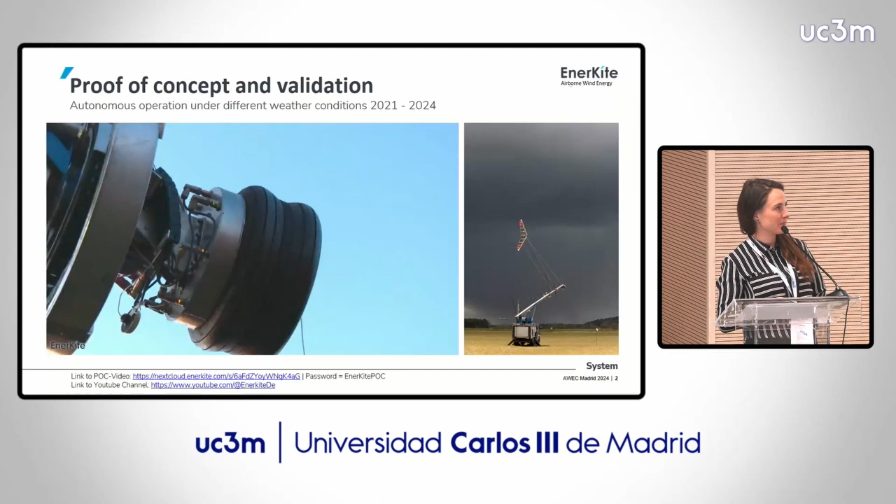Yes, hello. As already said, I am representing Florian. He is our CEO, and I'm presenting for him the Enerwing. That is our wing. I'm, to be honest, not really into the wing topic, so I'm trying my best here. I will start with a short video to show what type of system we have, because not everyone might know us.

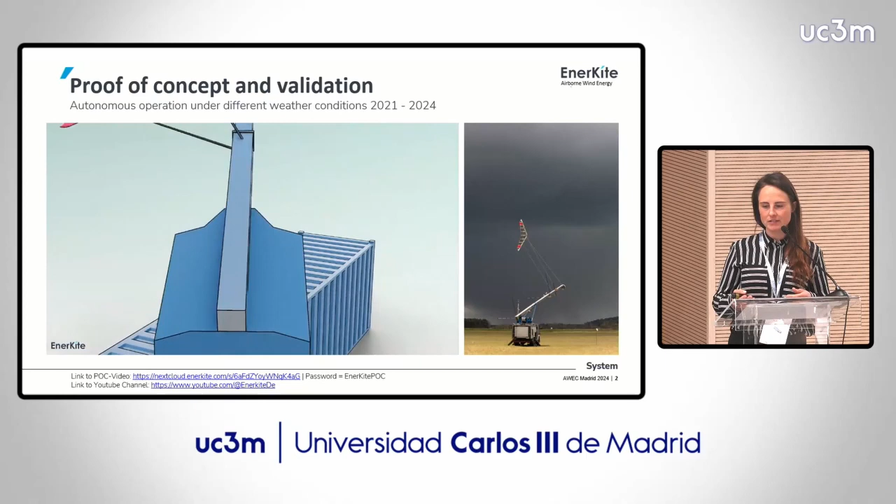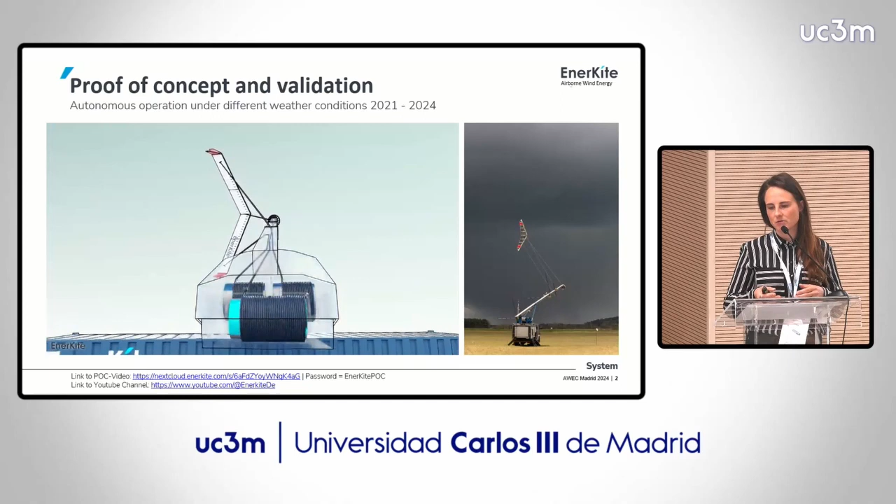Unique for us is the rotational start. As you can see here, we have a fixed kite which is docked at the mast system. The system rotates around the ground station. With that, we can basically get with almost zero wind at the ground into heights where there is always wind. That's kind of unique in the airborne wind scene. Also, the rigid kite is kind of unique. I will tell you more about that later on.

Here you can see the transition into the figure-8 flight. So we are also doing a yo-yo cycle here. What you can see here is our previous kite system. It was only there for testing. It's really cheap and easy to repair, and it was easy for the software to learn with that kite because it has some advantages. With our system, we are able to do the direct retraction because our kite is steerable. When we reach the top of the height, we can steer and then land directly.

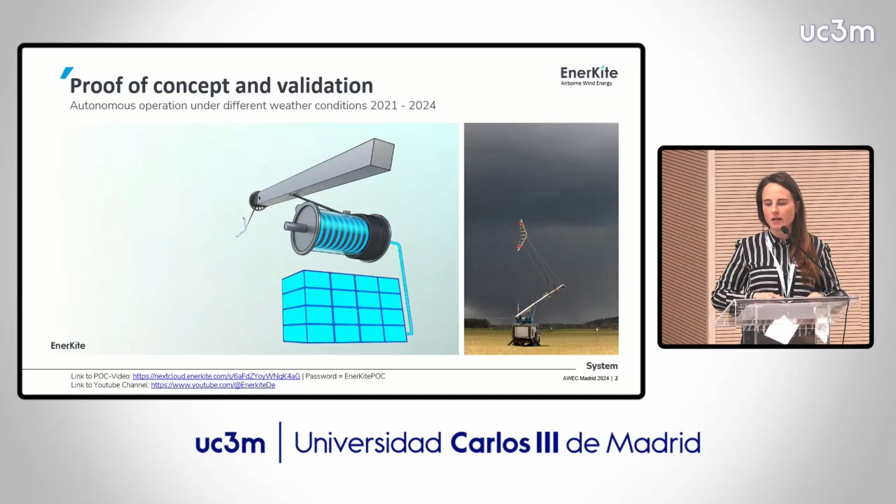Maybe a quick sum up, where are we standing now? So we had the concept proof in 21, meaning we had the full operation from start, operation and landing, fully automated. That we did with the left system here. It's our mobile system. It's a truck, and we have mounted the system on it, so we can test in different situations.

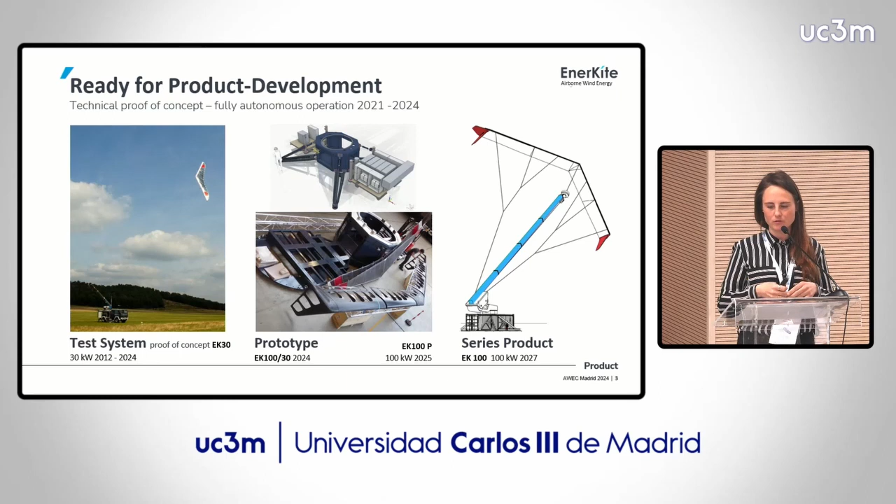We are currently building and mounting the prototype. The prototype is a combination of the top, so the actuators of the old system. The rotating parts will be placed on the new prototype ground station. In theory, the batteries and everything are capable to do 100 kilowatts, but we will start with smaller wings and smaller mast systems, so we are scaling in steps to avoid any difficulties by scaling too fast.

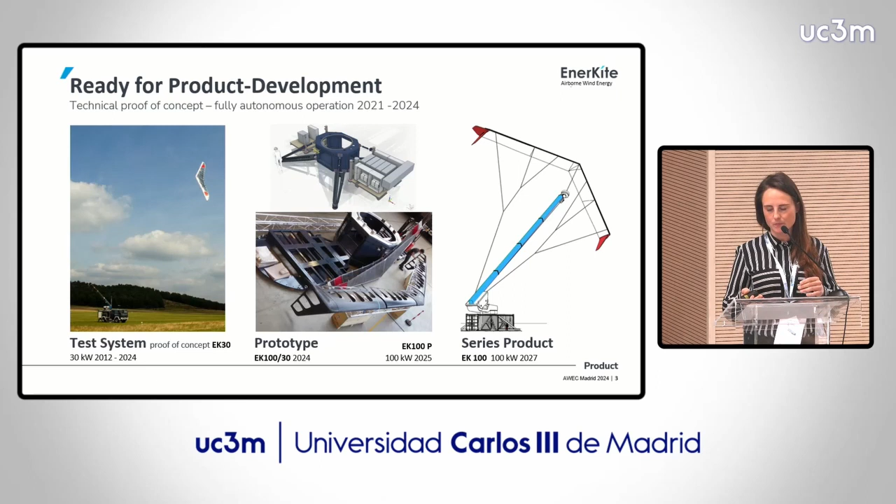Also we have had some difficulties, non-technical, which is why we are a bit behind schedule, but we're still planning to fly with the new system this year. Next year, we will scale up with new kites to 100 kilowatts. The series product, meaning the pre-series systems, will then hopefully be developed until 27.

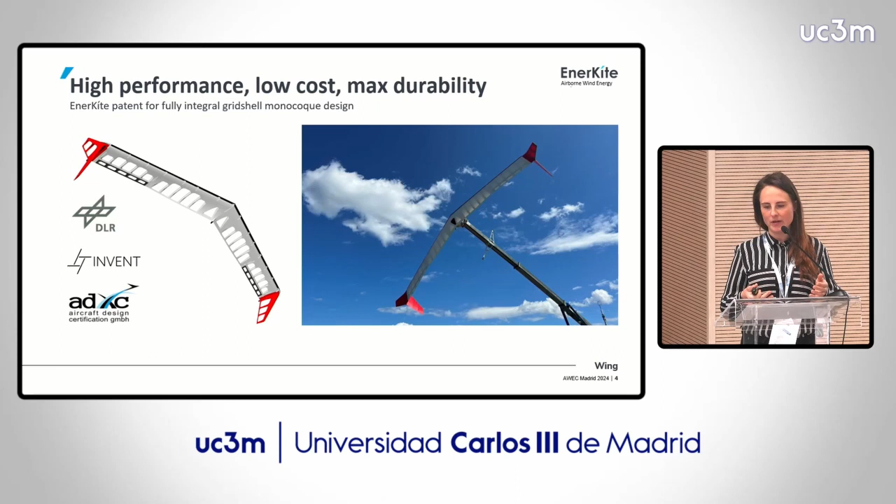Yes, as already said, I'm now here for the wing. The wing is patented. It's a fully integral grid shell monocoque design, meaning as you can see here, we have a full design. Sorry, maybe I will skip that first. Maybe to get a better understanding, we have compared different types of construction.

Now, as I said, patented is the grid shell construction. It only has about 24 parts. They can be mechanically mounted. It's highly durable. It's extremely lightweight. What you can see here in the video is a video of the flight test. Unfortunately, only rotational start and landing. Hopefully next AWEC we will show you the full cycle with this kite as well.

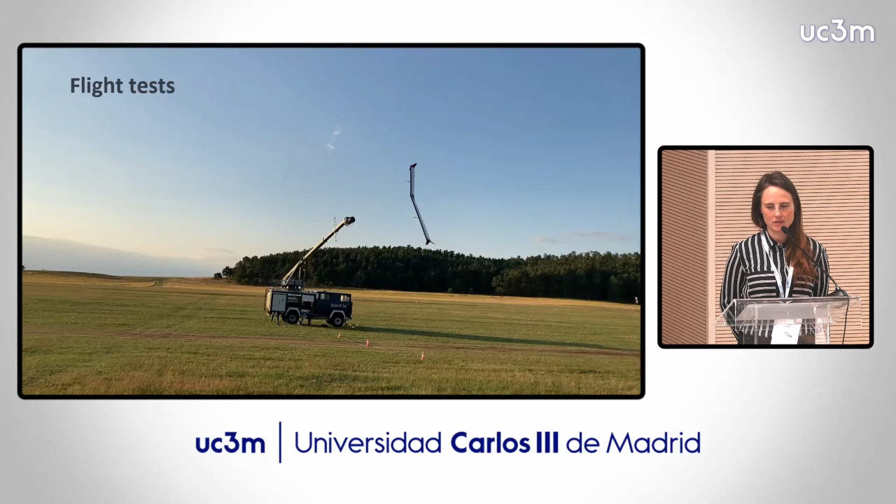What you can see here now is a wing with 6 meters wingspan. It has about 3 square meters. And it's extremely lightweight. So this wing, with everything like covering and electronics, weighs 12 kilograms. In the long term, we are aiming for a weight of 2 kilograms per square meter of only the structure. So there will be some additional weight through the covering or maybe sensors and stuff, but the carbon fiber allows us to be really lightweight.

Basically we can say that we have a system that is really lightweight, durable and robust. It is able to be robust under certain weather conditions, and also robust against birds. Maybe we will see what happens with birds. And so we are really proud to finally present it.

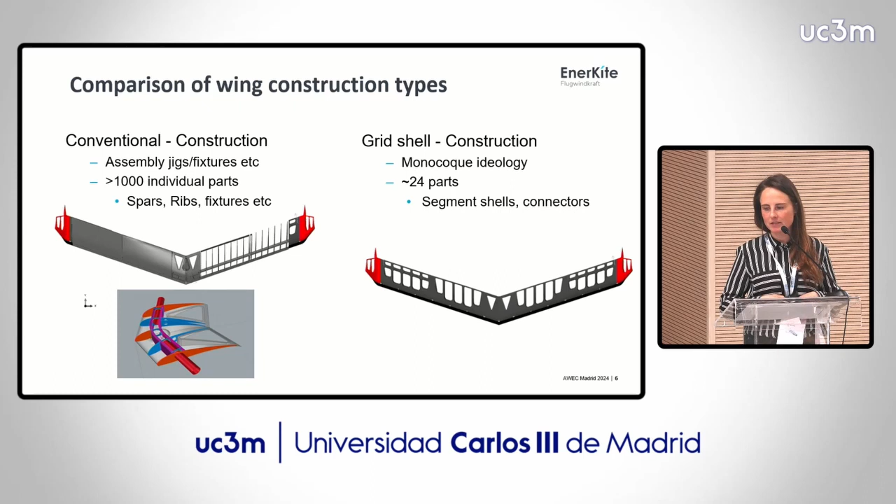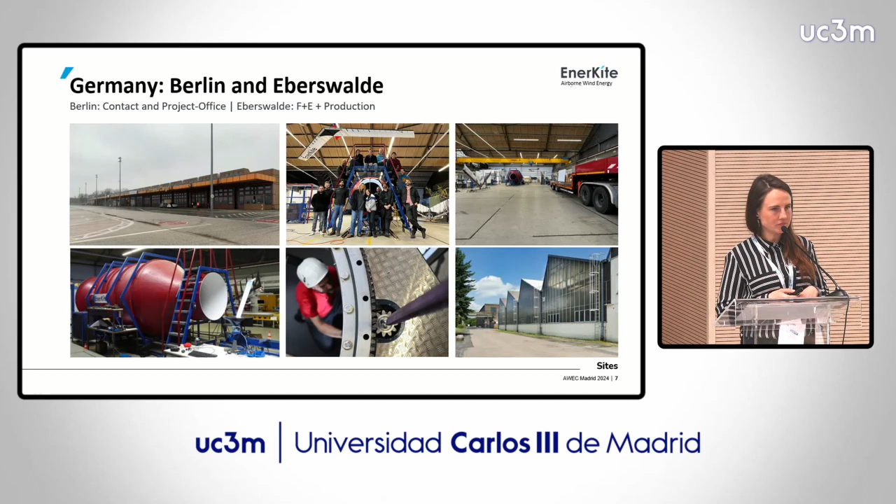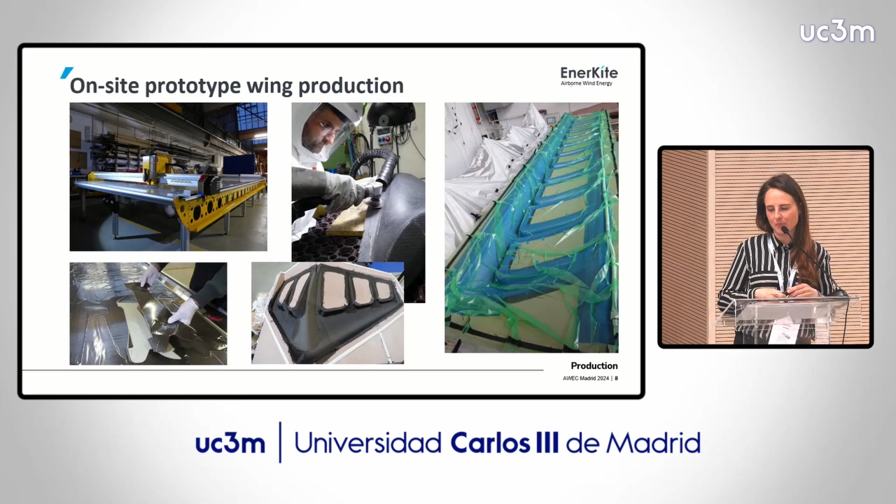So what you can see here is our own CNC cutting machine, where we are cutting the carbon fiber patches, as you can see in the picture below. Currently we are cutting off overlapping CFK parts ourselves, but in the long term it's super easy to do that with robots. Also, due to the low amount of parts, it's super easy to achieve a really easy mounting and production system. What you can see on the right is the implementation of resin on the vacuum.

Maybe also the last slide here, the perspective, where we want to get. So in general, for the whole system, we say we are comparable to land machines. They have a similar or even greater amount of parts. We have done research on how long and how much is needed to produce such systems, and we say that we can really compare to that.

And what is really nice, for the series production we now have some really big partners, and mainly for the wing we are really happy to have Airbus on our side, who is doing the series production. In a first evaluation, they assumed that we can have 120,000 operational hours with one kite. Of course, we have the ability to replace parts that are under more environmental stress. But that would mean we have a durability of 10 to 15 years with one system, and afterwards we have to replace it.

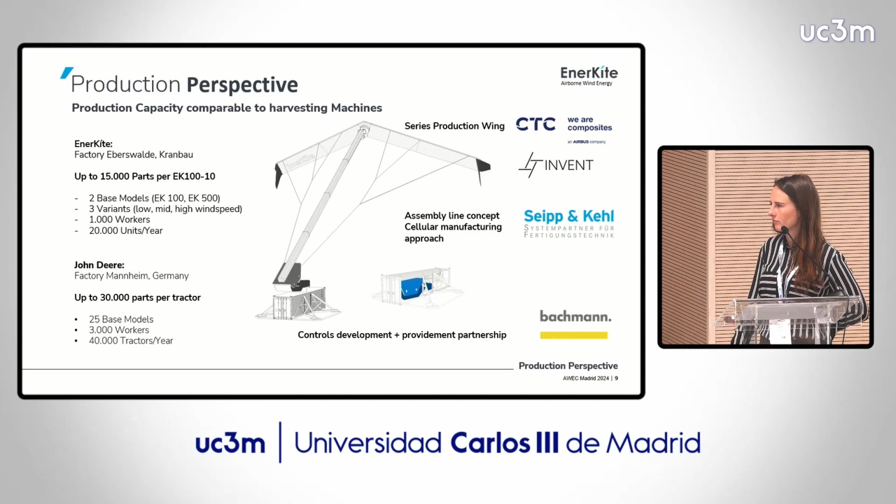But in general, we are aiming for a 30 feet container, so also mountable on a truck and easily installed. Thanks. Any other question? Yes, here, Rod. Wait a second.

Wow, well done. That's incredible. That slide there mentions a low, a mid, and a high wind speed. Is that the wing? Yeah, that is done by the wing. What you saw and what we are aiming for first is a 10 meters per second design wind speed, which would be a high wind speed. But in the long term, we try to do an 8 meters per second design and something in between.

So are you intending that 3 wings are deployed to a site for when the wind changes? No. If we are looking at the wind speeds globally, we will provide the wing matching the site. For example, Bavaria in Germany will have something else than Brandenburg in Germany probably. Thank you. Maybe one more question. Yes.

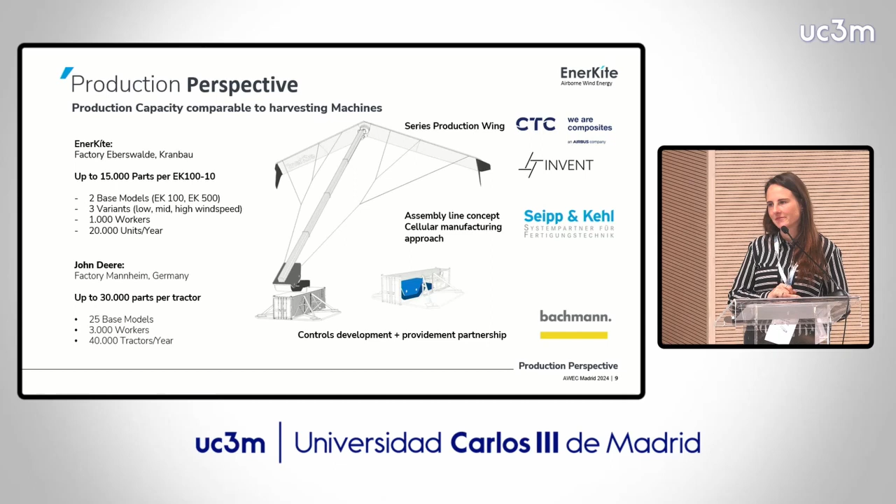Hello. Very good presentation. My name is Ignacio Cruz from CIEMAT. I have a question about the manufacturing process. I think the new strategy for manufacturing is based on 24 parts. On that slide, the vacuum infusion solution has been used, but it seems it's half of the wing, more or less. So what are the main difficulties to manufacture the wing in one shot?

That is probably a question I have to pass over, because I'm not involved in the wing production at all. I'm really sorry. But I will come to you afterwards, note it down and send you the answer. Okay? Thank you very much.